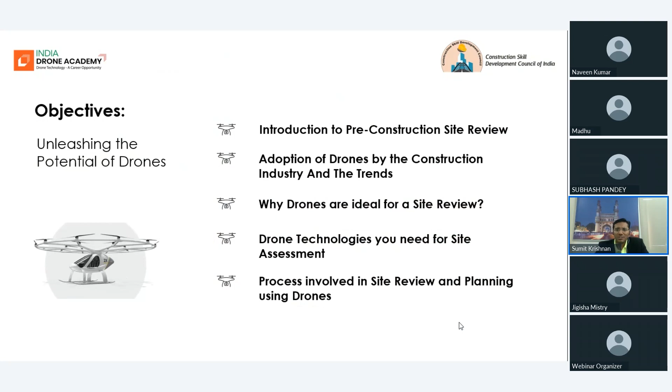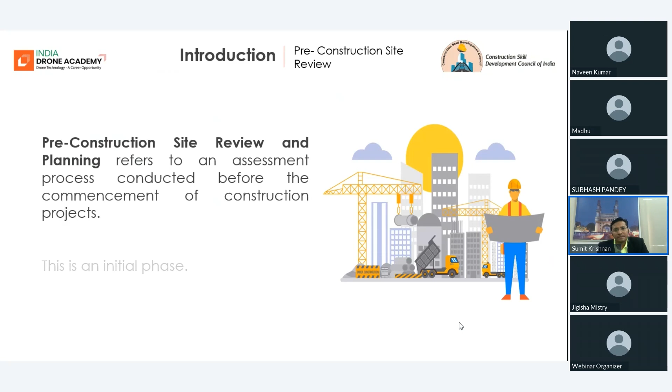Pre-construction site review and planning refers to an assessment process conducted before the commencement of construction projects. So this pre-construction site review and planning is basically an assessment process done before the construction starts. Among various phases of construction projects, there is a phase known as site review and planning, also referred to as the pre-construction phase. This is the initial phase, and it involves evaluating the physical and environmental conditions of a site for project planning and decision making.

Now, why do we need evaluation of physical and environmental conditions of a site? Or what are those physical and environmental factors that affect the construction? This site's characteristics, physical and environmental, affect two important things in a construction project: one is the cost estimation of the project, and it also impacts the scheduling of the construction work. So the evaluation of physical and environmental conditions of the site becomes necessary.

Through physical conditions, we mean a construction engineer would like to know what type of soil is at the site where they're planning construction, what is the topography of the land, what is the elevation, what are the contours of the land, and which are the neighboring structures near the construction site, because all these things together will impact the construction work.

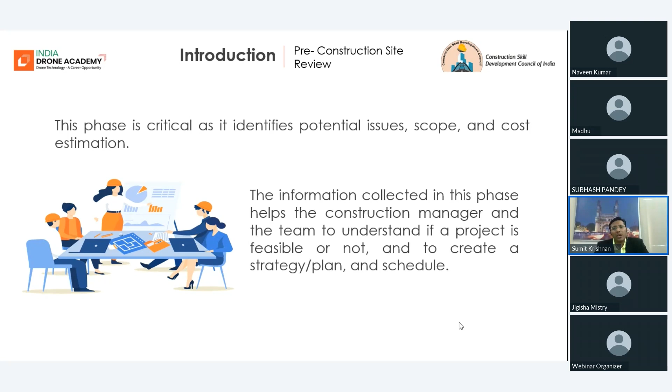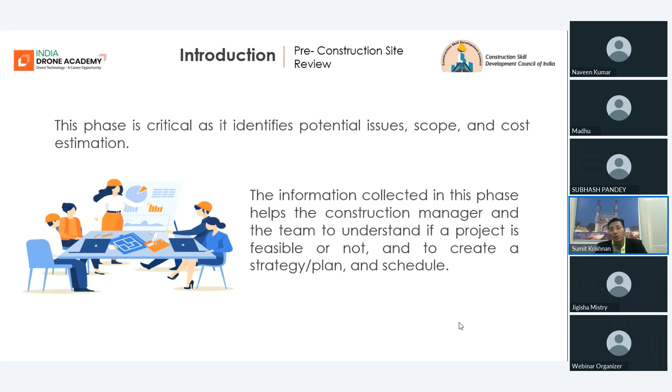This phase is critical, as I already told you. It identifies the related problems around the site, and also it helps in the cost estimation. The information which the site analyst, or the construction engineer, collects in this phase helps the entire team understand whether the project is feasible or not. It helps them create the plan and also make a schedule for different phases of construction.

Let us now talk about the involvement of drones in construction projects. The use of drone technology for site review and monitoring is increasing day by day in the construction industry. There are trends which include examples of integration of drones with BIM and GIS as well. BIM stands for Building Information Modeling, and GIS stands for Geographic Information System. Because there is continuous advancement in drone technology, whether we talk about the hardware or the software, their capabilities are daily increasing for further use.

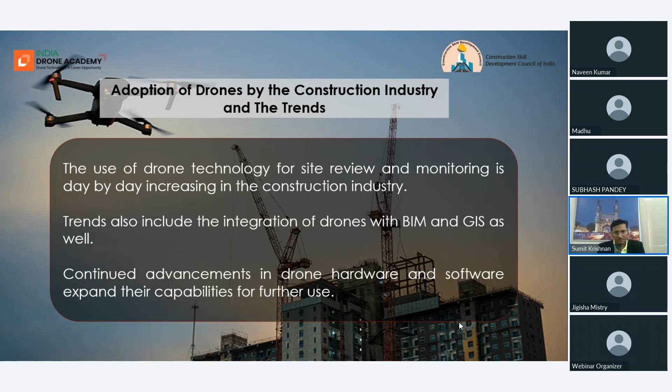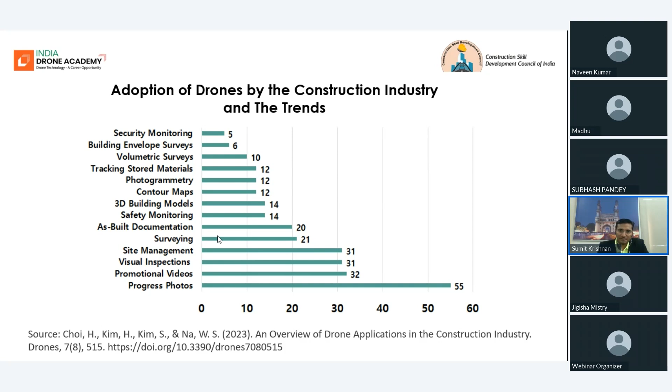Let's have a look at this video to have a little more clarity.

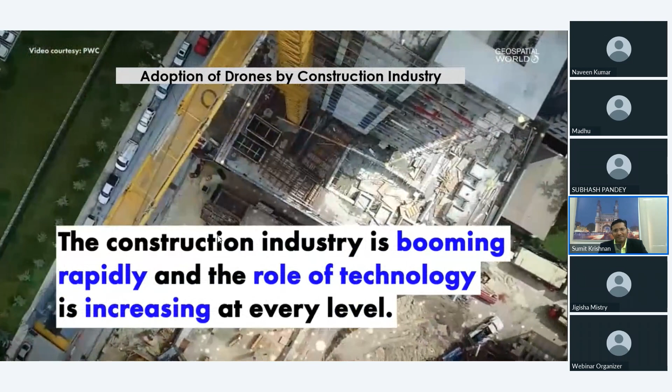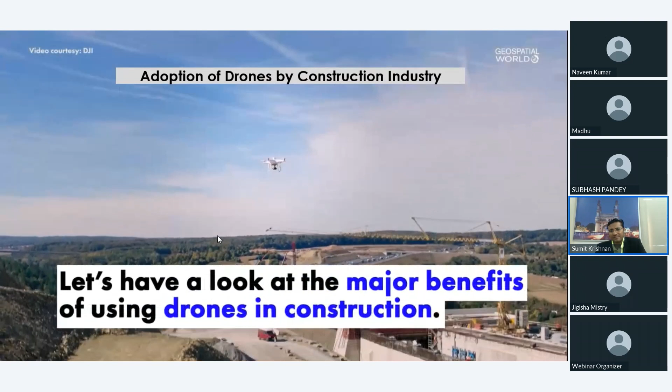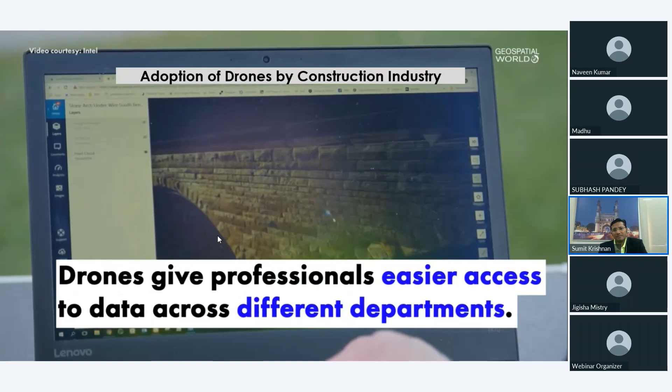This was a short glimpse into the adoption of drones by construction industries.

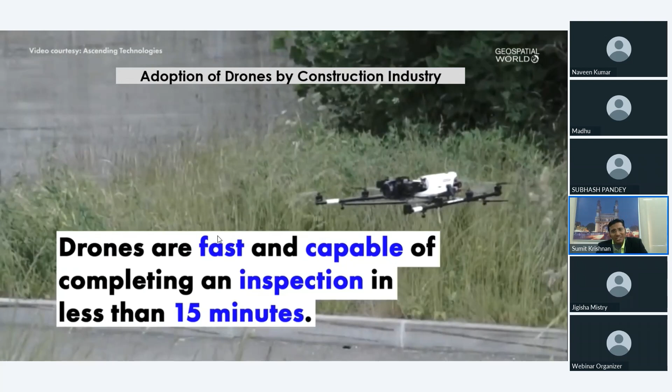Let's now talk about why drones are ideal for site review purposes. And believe me, there are many reasons behind it. One is drones allow suitable site selection. It gives a comprehensive overview of a site, and this overview, which you get from the drone, is not possible by any other means.

The drones also help in the assessment of site characteristics and issues. As we were talking in the previous slides, in pre-construction site review, assessment of site characteristics like physical and environmental factors is very important. The drones can help you better assess these site characteristics so that you can know the issues in early stages before the commencement of construction.

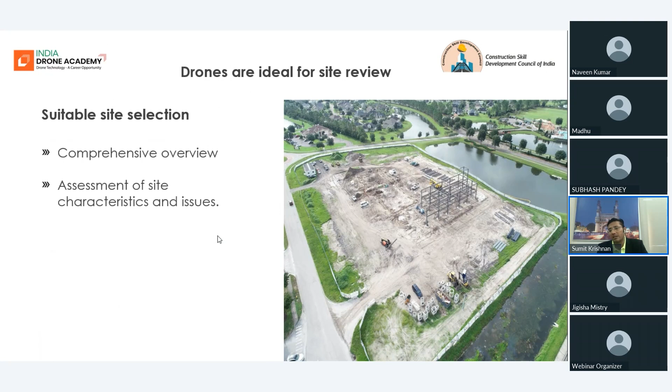After this assessment of site characteristics, one can evaluate factors such as the level of accessibility to the site, which neighboring infrastructures share the same ambience with your construction site, as they are going to impact its functioning, and also the environmental factors.

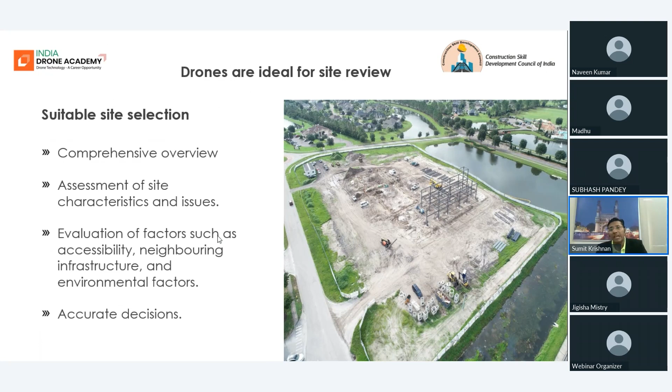After all this analysis of factors, drones allow construction project engineers to take the right decisions, because after this analysis, they can easily understand whether the site meets their requirements or not. Only then will they proceed with their planning and work.

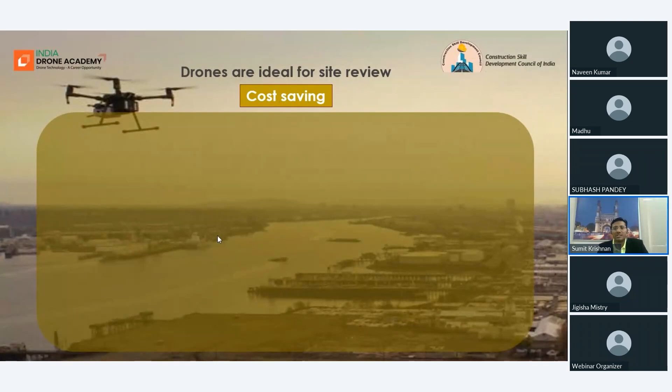The second important benefit of using drones for site review is cost saving. Drones are cost saving there. Before drone technology, gathering aerial data was a very tough and expensive task, especially for large and challenging terrains, compared to on-foot data collection methods or manned aerial vehicles like helicopters. So construction sites won't be using helicopters to collect aerial data, of course, because it is very expensive.

But drones make all these impossible things now possible. Whether the terrain of your construction site is irregular or very large, it doesn't matter. Drones can cover and execute the survey for site assessment for very large acres of land, which otherwise would be very time-consuming and difficult.

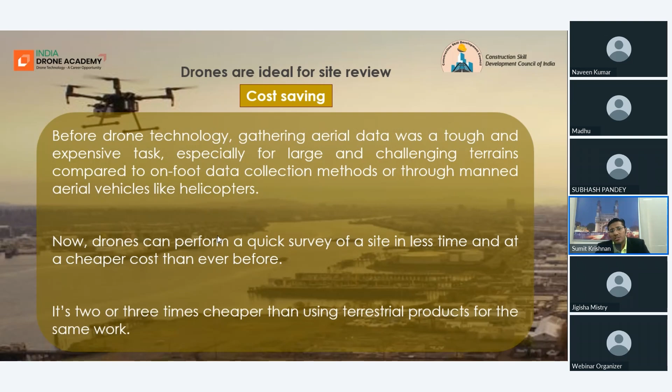For someone who wants to do data collection on foot, drones can perform a quick survey of a site in less time and at a cheaper cost than ever before. Many times business owners and industrialists ask what is the return on this investment in drones. The important answer is that it's almost 2 or 3 times cheaper than using terrestrial products for the same work.

The next important benefit of using drones for site review is faster decisions and optimizing project timelines. Drones can provide instant and updated site views. They carry telemetry devices and other important sensors which can deliver real-time live video feeds to the control stations, and this data can be accessed by anyone sitting anywhere on the globe without having visited the site. This is one of the important and very nice things about drones, and it speeds up the overall project work.

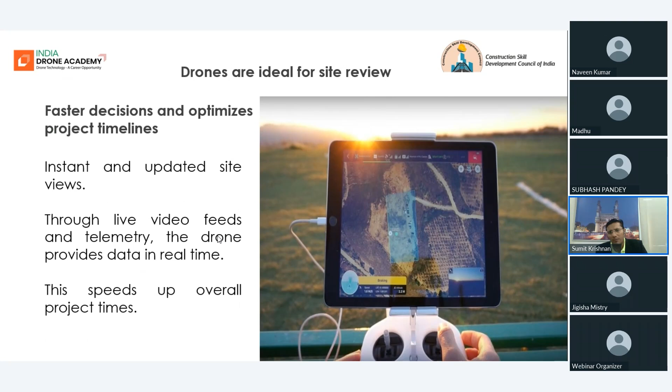Last but not least, documentation and reporting has become very simplified because of drones. In many construction projects, it is the duty of contractors to execute the site survey and collect all the information of the site before construction. Drones make their task very easy because through photos and videos, they can develop a very comprehensive report of the site.

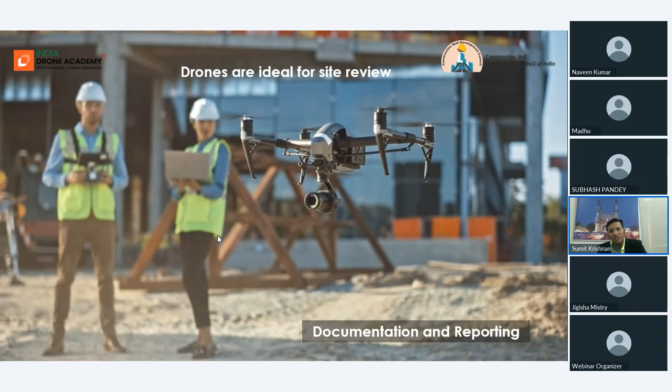Let us learn about the drone technologies we need for site assessment. First of all, a drone is required, which is also referred to as a UAV. We have already learned about the difference between a drone and a UAV in the previous webinar session. So you need a UAV or a drone.

This drone type depends upon many factors, like what is your budget, what are your preferences, and what quality of data you need. There are many factors that define the selection of available drones in the market. You can choose depending upon your budget. Mostly quadcopters are used compared to fixed wing because of their lower cost and easy operational features. They can be very easily operated.

Next, you need a payload, which is the extra weight that your drone has to carry in the form of sensors and cameras. These sensors and cameras may be an RGB camera, a thermal sensor camera, a multispectral camera, or a lidar sensor as well. These sensors collect the data of the site for mapping purposes.

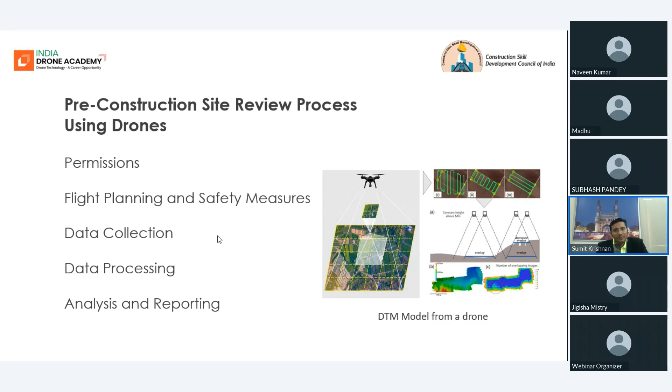Let's talk about the pre-construction site review process using drones. This process first involves permissions, then flight planning and safety measures, then the data collection stage, next the data processing stage, and finally the analysis and reporting stage. So what do we mean by permissions?

Before you start the pre-construction site review with your drone, and before you leave your office to the field, make sure that you have taken the necessary licenses and permissions for drone use. Drones cannot be operated by just anyone in India now, because DGCA has mandated that anyone who operates a drone should have a license to operate it, which we call RPC, Remote Pilot Certification, from the DGCA. So make sure you have the necessary license with you.

You should also make sure the construction site where you want to use your drone is not in a red zone. The DGCA has divided the airspace of India into red zone, yellow zone, and green zone. If your construction site is in the green zone, then only you should proceed using drones for your construction.

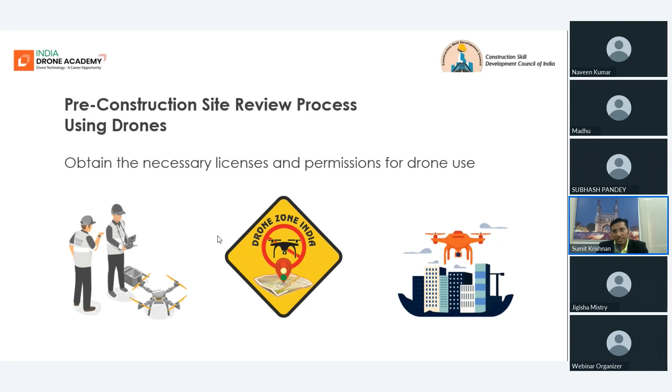Next, after obtaining the necessary licenses, permissions and insurance, you can go for flight planning. You go to your site and execute the flight planning. For flight planning, you must first fix your takeoff and landing locations in the construction site.

Before you fly your drone, there is a pre-flight checklist which every drone pilot has to follow. In that checklist, one important check is checking the weather information. You must ensure there is no rain, no strong winds, and no fog in that area, because you cannot compromise with the safety of the drone operation.

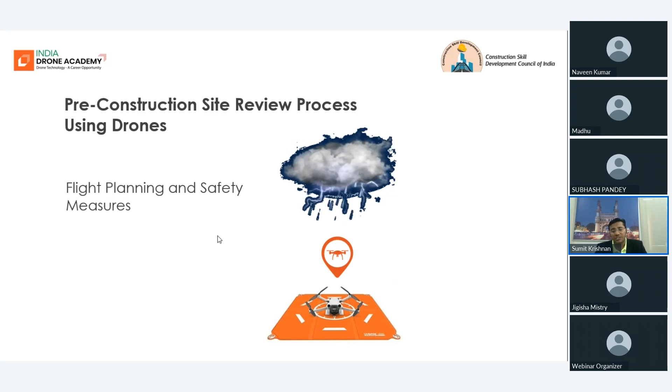After you have taken care of weather and set up the takeoff and landing locations, or the home points, in the ground control software, your remote control will help you take care of your drone during emergency situations. Your drone will be capable of returning back autonomously to the home point set by you prior to flight. This is why I'm giving strong emphasis on flight planning importance.

One other important pre-flight checklist is checking the battery before you fly. The drone battery should be 100%. Your ground control system device should also be 100% in battery capacity. What is the ground control system? It may be the laptop you are using for mission planning, or also your remote control, because that is also battery operated.

Why am I saying this? Because sometimes if the remote battery goes off, you will suddenly lose communication with your drone, which may result in an emergency situation at the site. It will damage your very costly drone, let me tell you. These are very sophisticated devices and require a lot of care.

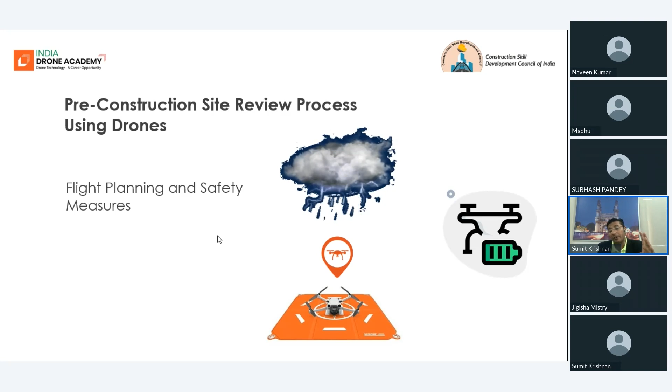You should also be ready with an emergency plan, in case you lose control of your drone, for how you can procure your drone back safely. So that emergency plan also you should be ready with. You must be wondering, sir, what kind of emergency plan we may have for such conditions.

My dear, this is a part of training. I cannot tell you in detail about each and every point in this one hour webinar. This is why we, DGCA authorized remote pilot training organizations, train candidates to have all these things in mind. We train people on what a drone pilot should do in an emergency situation so that damages can be minimized.

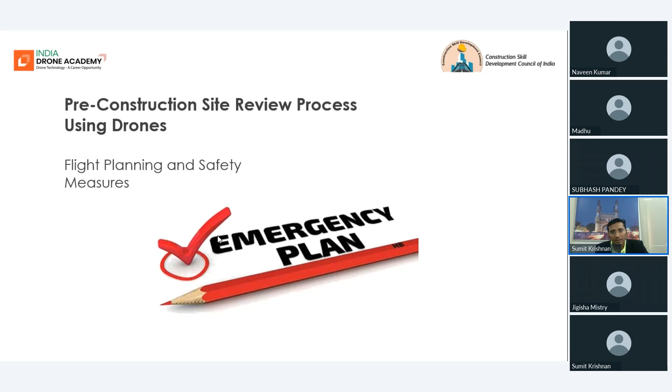Next is the data collection phase. In this phase, images of the construction site are to be captured, and you'll be required to record videos. The images and videos of the construction site are not just like capturing photos from ground cameras.

There are special skills required, like how you have to cover the entire 360 panorama view of the site, and how you should cover the entire environment with every detail, the location of the objects on the ground. All these things have to be captured and collected in the form of data.

If the data collection is not done accurately, your mapping software will not give you the result you want. So data collection is to be done with a lot of accuracy and care, and there are certain guidelines to it.

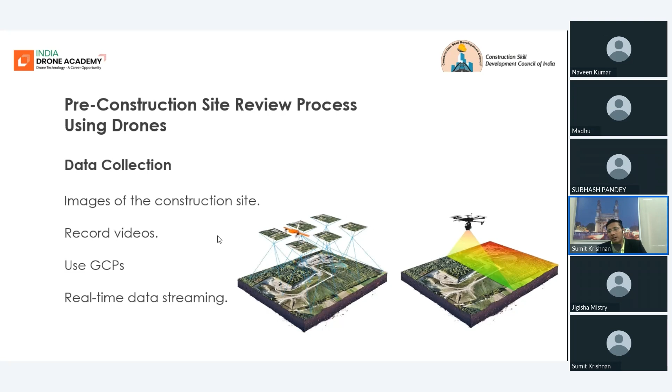Real-time data streaming: sometimes construction engineers and civil engineers may require real-time data for visualization purposes, so that at the same moment they can guide the drone pilot to cover a view which may be missed by him. So this opportunity also the drone gives during this site assessment or survey process.

Let's talk about data processing.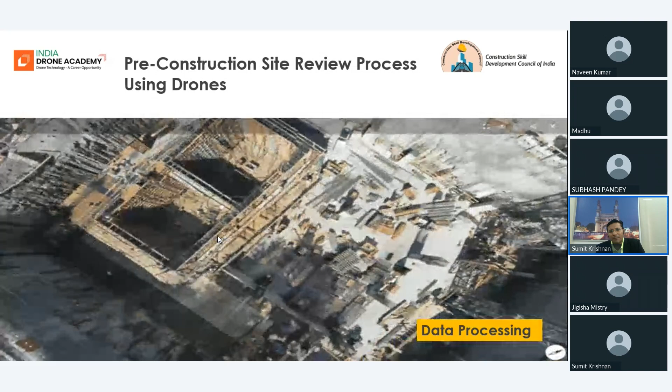Data processing is about taking your drone data to a mapping software. Your mapping software may use photogrammetry methods or 3D point cloud method to stitch the data collected from your drone. This is basically an automated process, you need not do anything. You just feed the entire data from your drone to the software, give some simple inputs, and the software will take care of the rest. If you are supplementing your data with GCP point data as well, it can give you a very accurate 3D model or map of your construction site.

And the result which you get after this data processing is very, very accurate. Without visiting the site, just on your computer screen, you can execute the measurements of important things of your site.

Because a construction engineer knows the importance of earthwork. This earthwork is required to be done prior to construction, where you prepare the land. You have to remove the top layer of soil, remove the bushes, remove the vegetation, and prepare the site for construction. So how much amount of earthwork is required to be done? This drone data can very accurately help you calculate that.

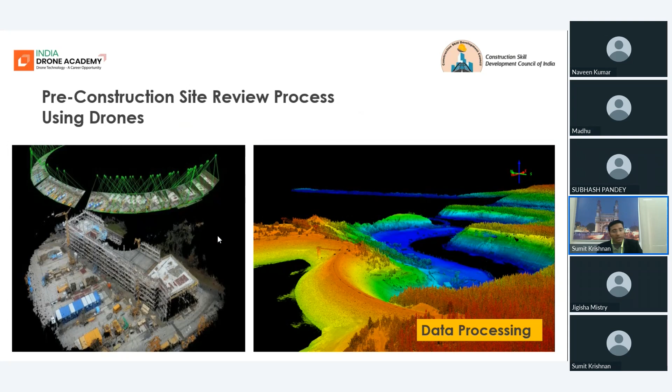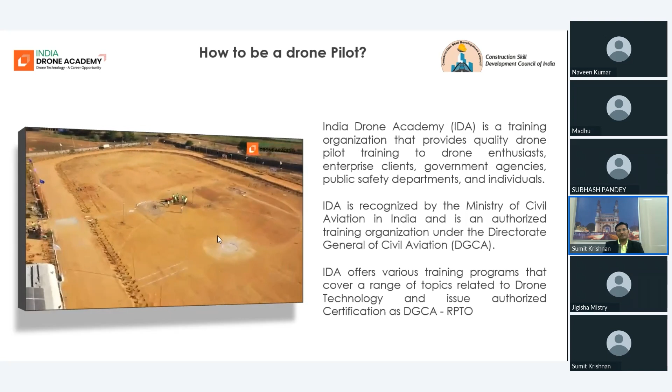Hello and welcome to India Drone Academy, an innovative training program designed to help individuals and organizations learn how to operate drones effectively and safely. To become one of the premier and largest drone training academy, drone manufacturer in India, and create a network of drone pilots and entrepreneurs across India.

Industry overview globally: the drone analytics market is estimated to be valued at US $2.1 billion in 2022 and is projected to reach $6.5 billion by 2027. According to Frost & Sullivan, drone usage in India within the agriculture market will grow at 38.5%.

Changing face of the Indian aviation industry: the liberalized new drone policy 2021, the production-linked incentive scheme, the Kisan drones, PM SVAMITVA Yojana, and our business model.